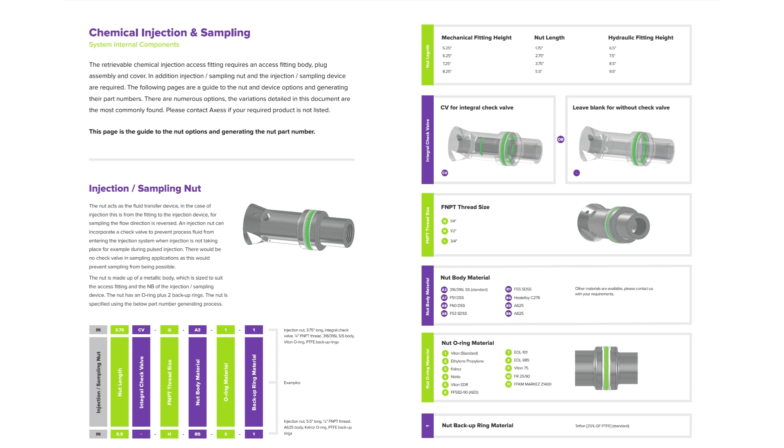But what is an injection nut, and why does the length matter? The injection nut is the key to the operation of the retrievable injection and sampling systems.

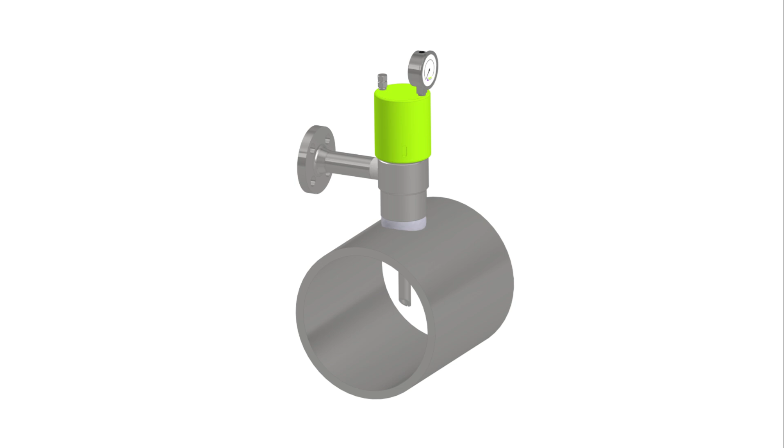The injection nut is inside the Axess fitting. It acts as a fluid transfer device via the holes drilled in the side of the nut body. It has seals at the lower portion to prevent the process from entering and also to ensure all injected fluid exits via the quill. In the case of sampling, the nut acts as a transfer device for a sample of the process to be taken from the system during normal operation.

The injection nut can be supplied with an internal check valve to prevent the process from entering the Axess fitting body and injection system in applications where injection is not constant and when the injection system is switched off. Note that sampling systems do not have such a check valve, as it would prevent the sampling from being possible.

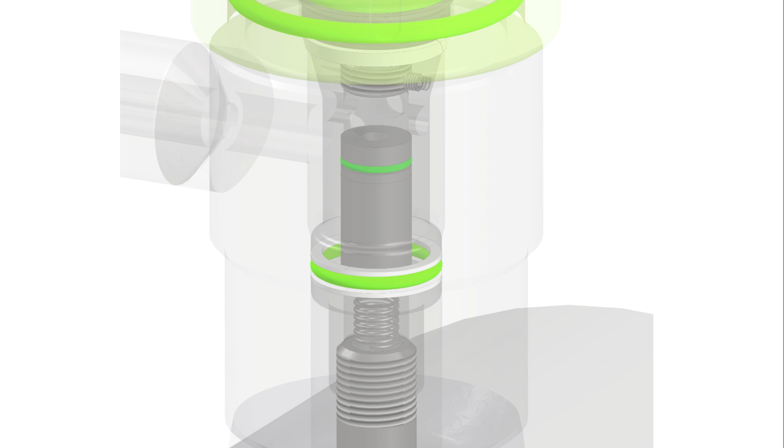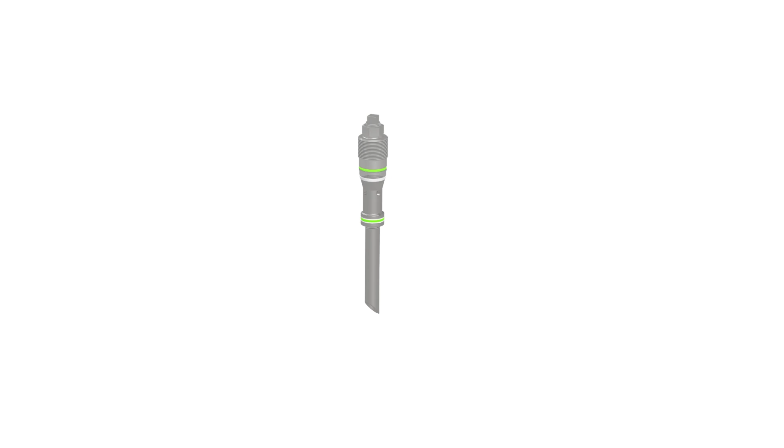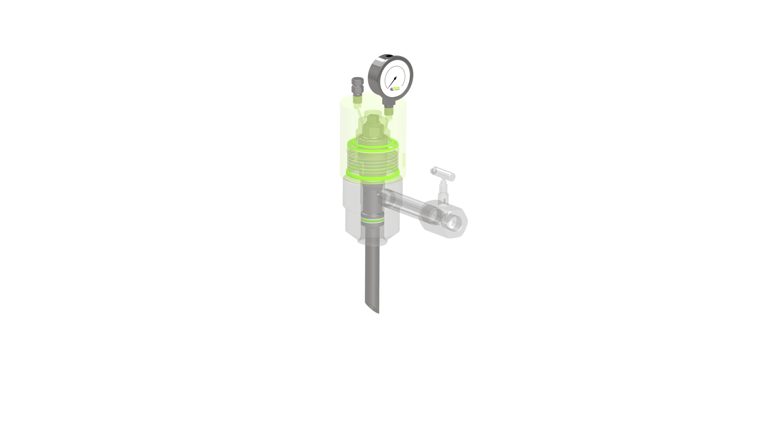The injection nut has the quill attached to it. The plug attaches to the injection nut, and the plug seals the Axess fitting body. The nut aligns with the Axess fitting T. In terms of the Axess fitting, you would add a cover and the T itself, shown here as NPT with nipple and valve. Flare weld Axess fittings would be welded to the pipe.

Now for the question of how to specify the length of the nut. Let's run through some examples. A flare weld Axess fitting with a 1/4 inch T has a height of 5 1/4 inches.

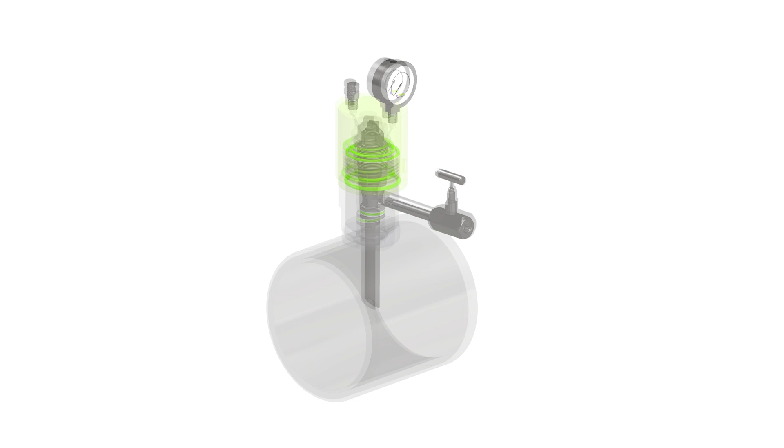This requires a 1 3/4 inch length injection nut. A flare weld Axess fitting with a 1/2 inch T has a height of 6 1/4 inches. This requires a 2 3/4 inch injection nut.

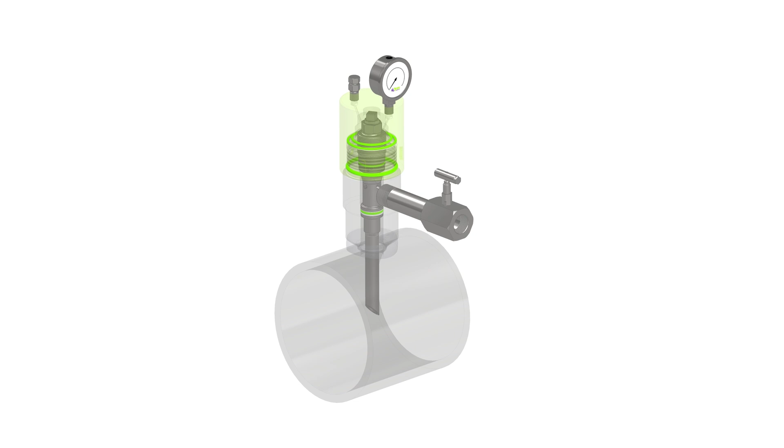Increasing the T size to 3/4 inch results in an Axess fitting height of 6 1/4 inch as per the 1/2 inch, so the nut remains as 2 3/4 inch. A 1 inch T on a flare weld fitting gives a height of 7 1/4 inch, so the nut length increases to 3 3/4 inch. Finally, an 8 1/4 inch fitting, such as this flanged example, requires a 5 1/2 inch nut length.

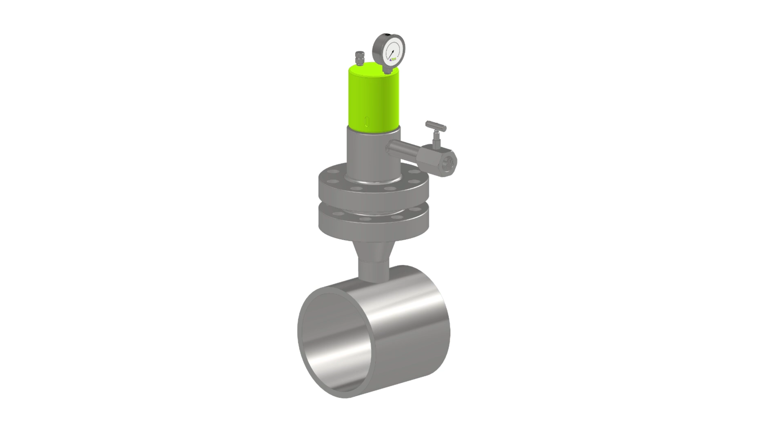The examples shown were all with NPT Ts. The height rules also apply for fittings with flange Ts.